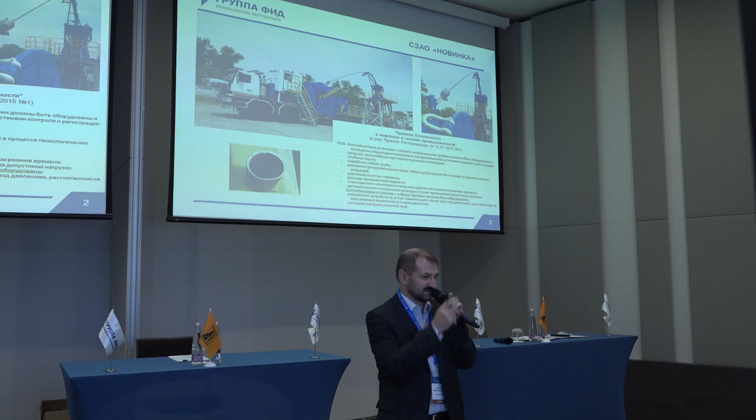Defect detector: we developed it 2 years ago, now we are improving it. So this is the defect detector for the CT tubular. You could see an example sample at the entrance to the room.

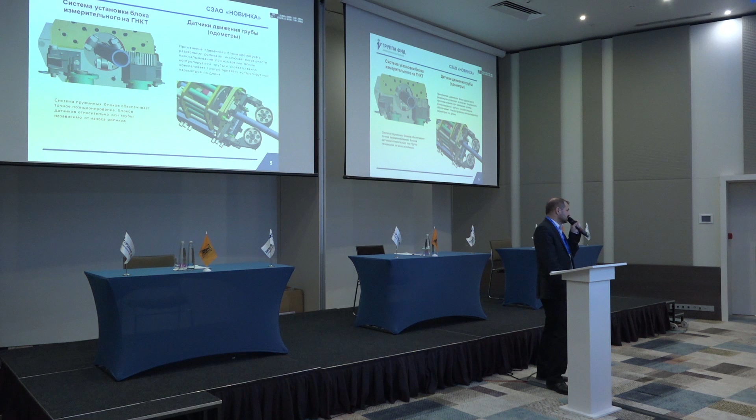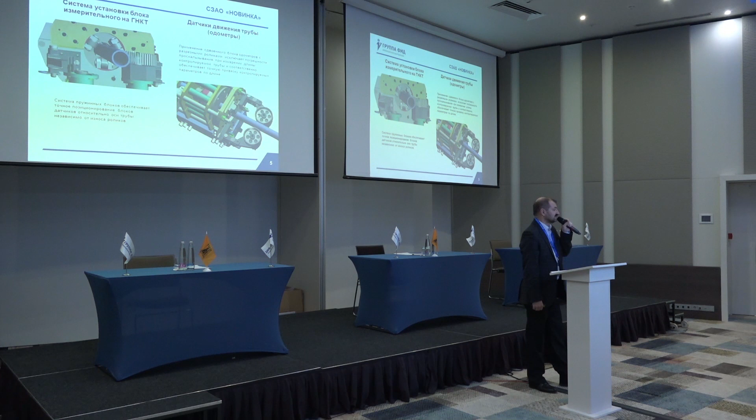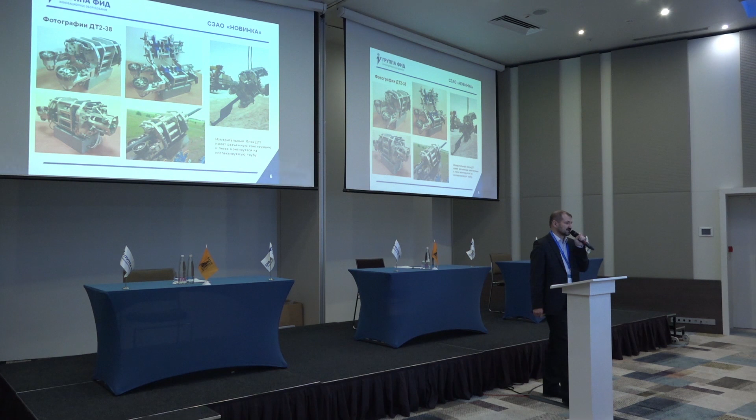It avoids sliding of the tubular. So we have rolls with special slots that take all of the mud, and we have two odometers, and we reduce our dependency on the tubular slips and slides inside. So this is a photo for the CT 38 millimeter in diameter. There is no point in pulling the pipe through the defectoscope. So we just open it and install the pipe.

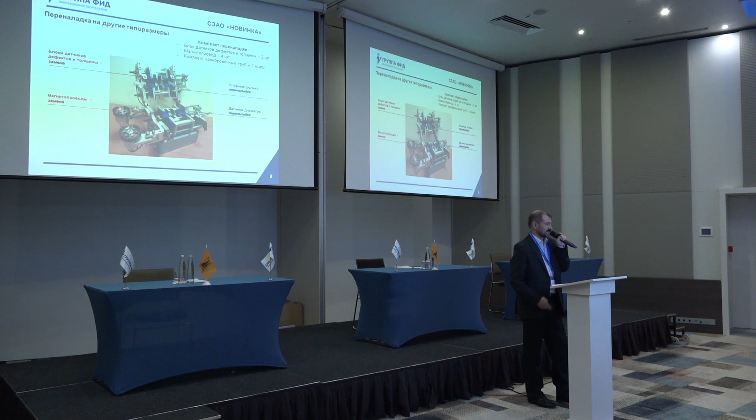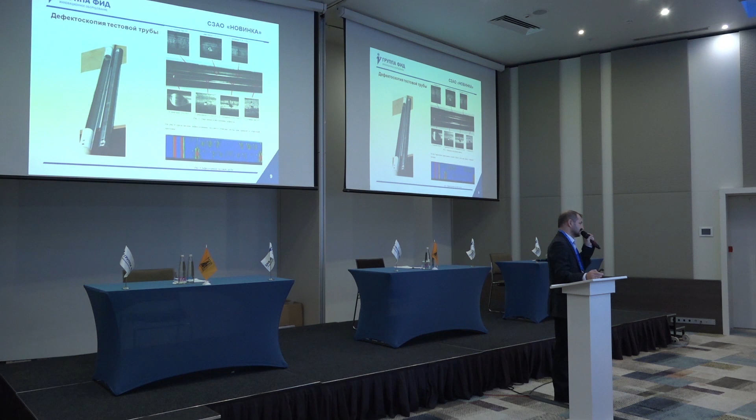So this resetting is done during one day. So if you move from one diameter to another diameter, you're replacing some parts, and you can ensure transit in the system to a new diameter. So this is the test pipe that we use when producing our detection devices. So this is the tubular with different defects. We pull it through the detection device to fine tune it, and you see how the information is shown on the screen.

We also developed a special software for this device. This is fully in-house. We started developing this software in 2018, and there were several versions. If you have a look at the beginning and now, we have quite considerable differences in this software. So this is the geometry, vibration, thickness, as a text and graphs. It archives all the data. The data is recorded on SSD, and later on you can analyze it.

There's a visual and sound signaling system. So for this defect, we might set the maximum parameters. If it is exceeded, you will receive a signal. And for the operator not to miss it, the sound signaling will last until the operator presses a button, and this is recorded in a special file. So if some unprecedented event occurs, you will be able to see the history.

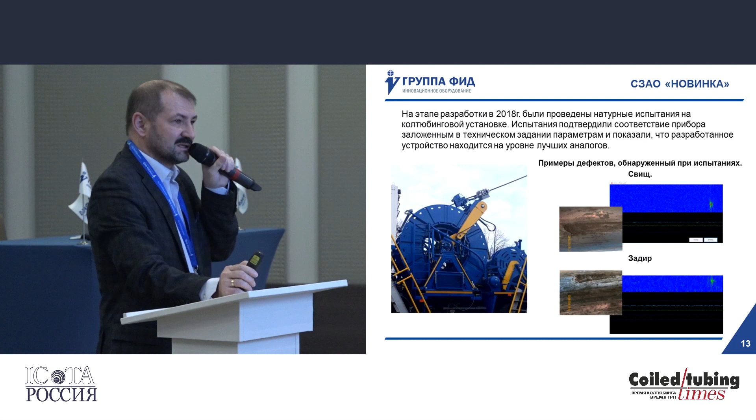So you can have a look at the photos. These are photos of our experimental works and tests conducted, detection of holes, and how these holes were depicted on the charts. So we developed our software, as I mentioned. It's the level of defect detection in particular. Over the recent years, we accumulated a lot of experience, so we received a lot of information and defectograms.

And if we take this magnetic detection method, it identifies the change in magnetic field. And at first stages, if you have 1 millimeter of additional material and 1 millimeter of removed material, it showed in the same way because the volume of metal was the same. Now we fine-tuned it, and all the defects can be divided into 3 groups, like small cracks, then small fragments like shavings, and the scratches outside, asymmetric scratches on the pipe surface.

And the software is built in such a way that it detects this difference, and when it sees a small volume loss of the material or a crack, it is depicted in red and green by the edges. If there's sticking of some material, it is marked in green in the middle and red on the edges. If we have scratches, asymmetric scratches, then green and red colors are used to depict the scratch.

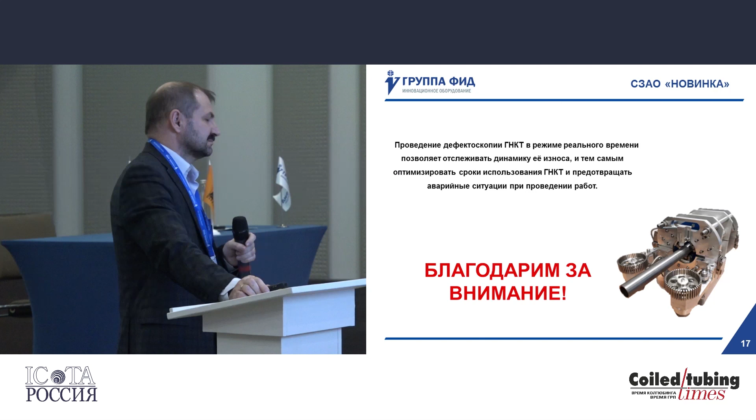Your detection devices are in operation already.

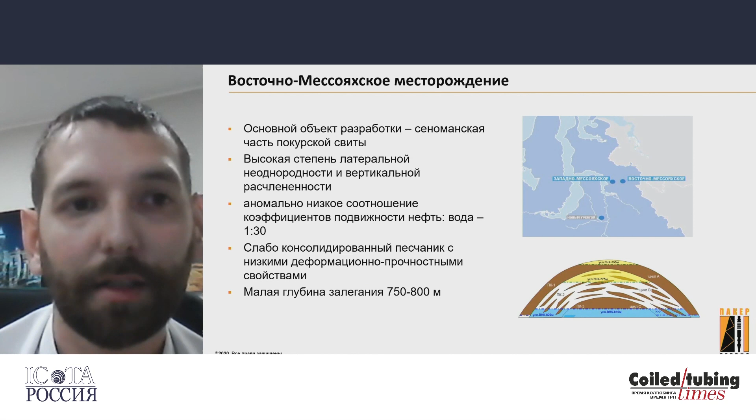There are different methods with the sand screen out and the production of fluid without sand screen out. And without sand screen out, we have chemical, physical, chemical, and mechanical ways of preventing sand produced to the surface. So the CTUs, we use various methods for preventing sand screen out, the bottom hole area treatments.

We use sleeves and collars, sliding sleeves, and a considerable part of works is normalizing the bottom hole. CT allows us to clean out the well bore and put it into operation. But today we will talk about a little bit different thing.

Historically, the development of this oil field can be divided into two phases. Phase one, this is well-known shallow wells, reservoirs with high sand content, and these are the challenges that we manage to tackle currently. However, there are other wells there. This is phase two with deeper reservoirs, 3,200 meters vertical depth.

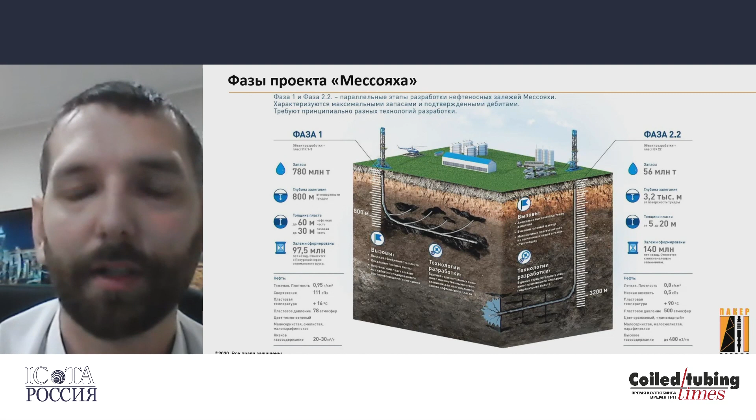These are abnormally high pressures and the complicated mineralogical composition of the reservoir and of the rock at this phase. So we have abnormally high pressure, as I mentioned, complicated mineralogical composition, and in this case we have light oil, which is very good and very feasible from the economic viewpoint, but high temperature. We face high temperatures there in this reservoir and in this formation.

Apart from the general challenges, we faced the challenges of a specific well. We needed to work at a horizontal well with a very difficult trajectory with a reservoir pressure of 490 bar. It's a deep well, around 5.5 kilometers, and the task was to activate fracking sleeves, restore the injectivity and get a stable fluid inflow.

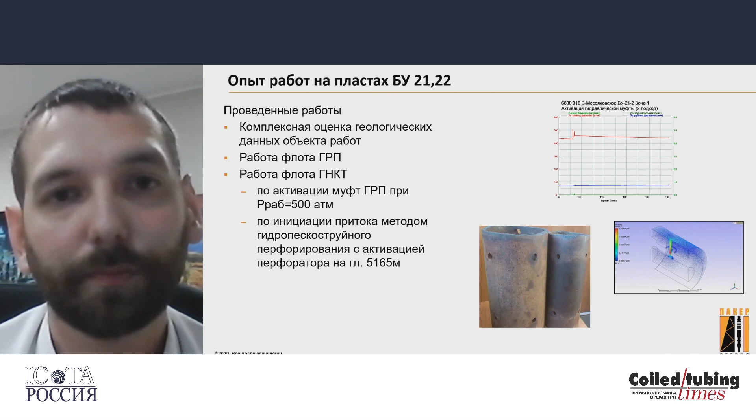You can see the activation of the fracking ports was not possible due to complications at the wellbore. We elaborated a set of measures to create additional perforation in the target interval where production was possible. After sand jetting in the target interval, we achieved the following. The well became flowing, so we achieved record high yields for this well, and phase number 2 confirmed its potential because we managed to produce light oil that allowed us to continue working in this formation at phase 2.

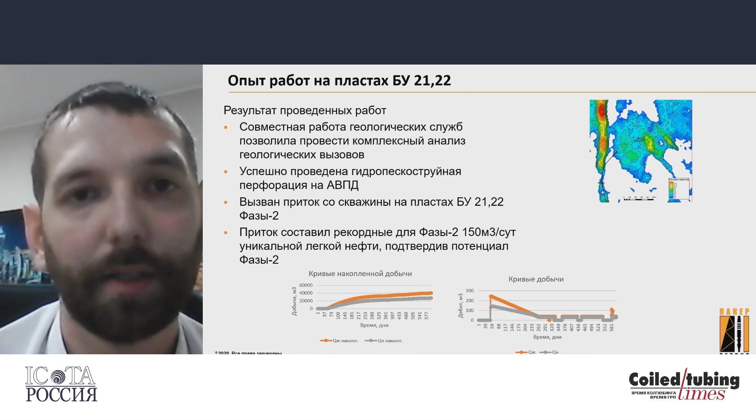First of all, the success was possible due to the work of our geological services that managed to do proper geological analysis. I can say that we confirmed the good potential for this formation. We confirmed the complicated mineralogical composition of the formation that requires addressing geological challenges, and this requires an integrated approach, CT and fracturing fleets, with high involvement of the client and of the contractor. So we did sand jetting in abnormally high reservoir pressures.

So I would like to extend acknowledgements to our companies, Research and Technical Center of Gazprom Neft and Packer Service Company, for the possibility of sharing with you our experience with this integrated approach to tackling geological challenges. That's all from my side, and I stand ready to take your questions. Thank you. We have questions.

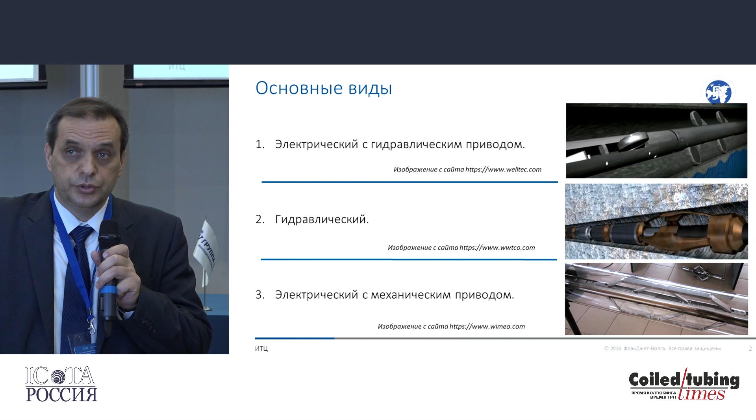After that, we developed the hydraulic control system. At the second phase, we need to modernize our hydraulic system because it requires some modernization. In parallel, we work on the electric control system that will be operational in parallel, and we also develop some attachable equipment to these tractors.

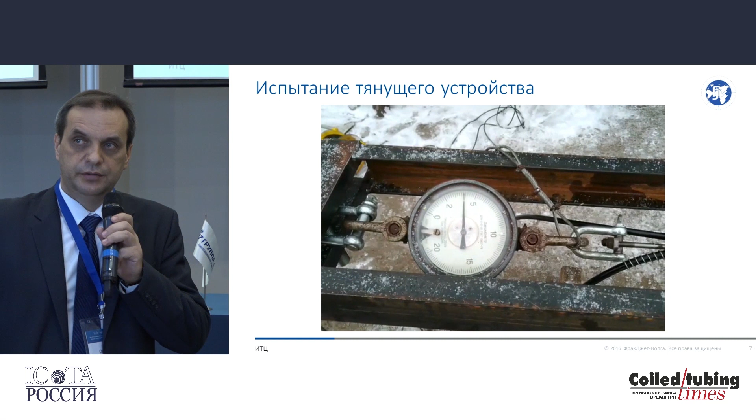As far as the main characteristics are concerned, Welltec is the leader in terms of the use of tractors. And if we compare the specifications of our tractor, it's 76 millimeters, which is comparable to what the competitors have.

The length of our tractor is 6 meters 41 centimeters. Probably with the update of the hydraulic drive, the length will change. It will be 6.5 meters max.

We haven't yet developed the electric drive. The pull force at 350 bar of pressure, it's quite a large pressure, we will not be using it, but at 300 bar, it's 4.6 tons. The weight is 176 kilos, and the fluid flow rate is 500 liters.

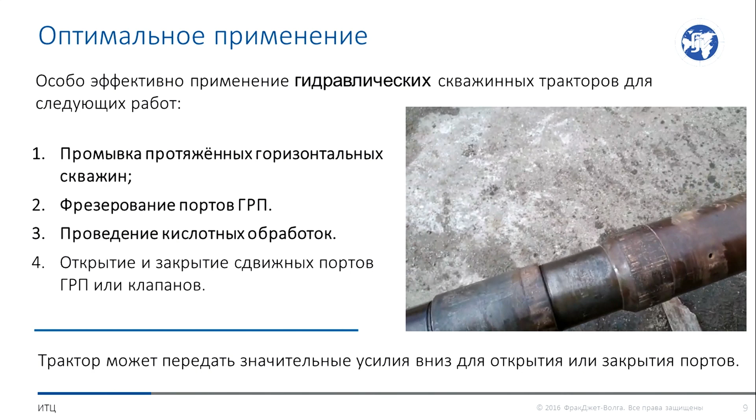Why do we use hydraulic tractors? First of all, to flush long horizontal well bores. Electric tractors have difficulties with this because you might run a sludge catcher device there, but it will not be able to clean the well properly. That's why hydraulic tractors are better compared to electrical ones.

Tractors can also be used to mill fracking ports. Hydraulic tractors are out of competition because we can select the optimal pressure, and with the optimal pressure, the tractor will mill the fracking ports.

We can also do acid treatments. We can open and close sliding sleeves. You can use this tractor to close the sliding port. You can see how it closes the sliding port.

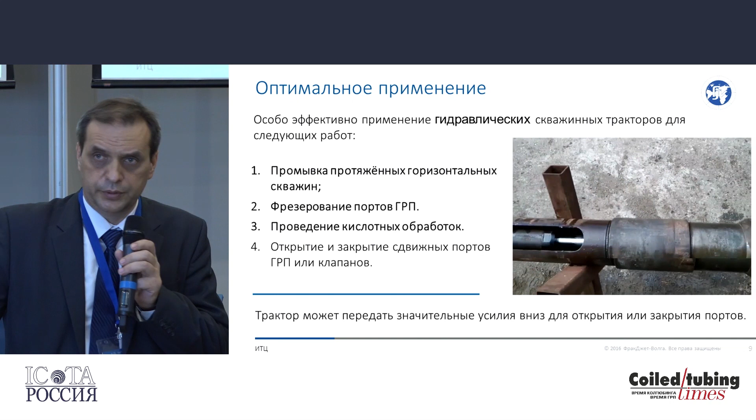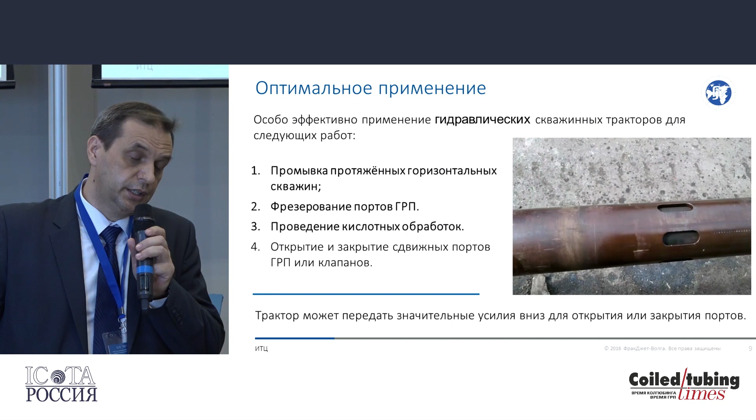You can also use the tractor for opening and closing ports on the bottom hole, since the tractor can generate considerable forces, which significantly simplifies the work of opening and closing ports at the bottom of the well. That's the end of my presentation.

Are there any questions? I will take your questions. Do we have any questions to the speaker? Then I will ask one.

As I understand, this tractor is meant for cased wells only, so far, yes. I judge by the slides - it won't be able to work in the open hole, because the contact stress would exceed limits and you would damage the formation.

We developed this ourselves. At the moment, most of our jobs are done in 114mm casing, so we designed it for that. But we have all the equipment in-house, so we can reconfigure it for the open hole. It's not so difficult - it's just not currently our task.

As I understand, the direction of movement is only one way, in one direction. Yes, it moves into one direction only.

So we don't have any further questions then. Oleg, thank you for a very interesting presentation.

Now we have the next presentation, again online. We have a connection, and we will have the next online presentation.

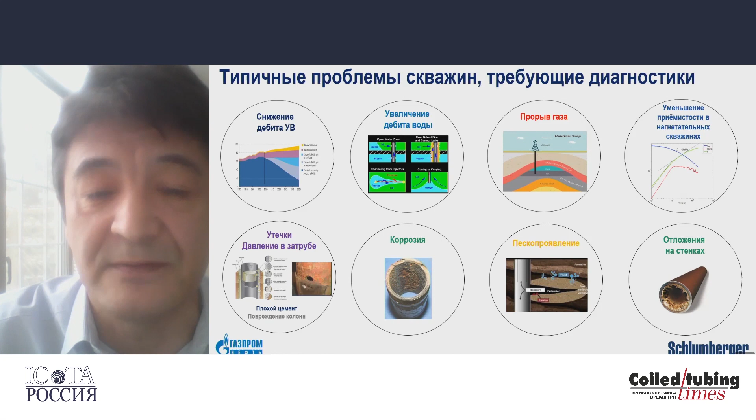Speaking about the typical problems, they are not new: this is well yield reduction, increase in water cut, gas breakthrough, etc., and sand production. You can see all these main problems on the slide.

There might be many, especially taking into account that well completions are becoming more and more complicated. We have horizontal well bores with non-cemented liners, with filters and sleeves, and more sophisticated completions with inflow control devices, etc.

Whatever completion you have, one of the most important aspects is preparation of the well for the survey, because we need to survey the whole well bore, the whole horizontal section, and we face some blockages due to debris, etc. There's a need for milling ports and doing other preparations.

So on this slide, you can see some analytical information on how we can prepare the well with different methods. Of course, preparation with well workover is the best approach - you can clean out the well, mill all the ports, but each method has its own disadvantages and cons.

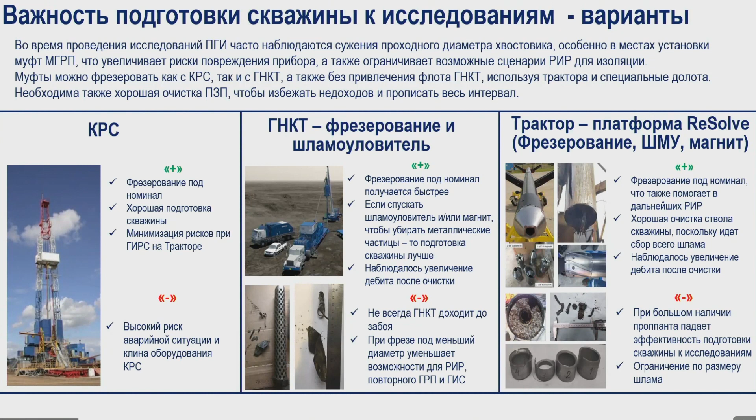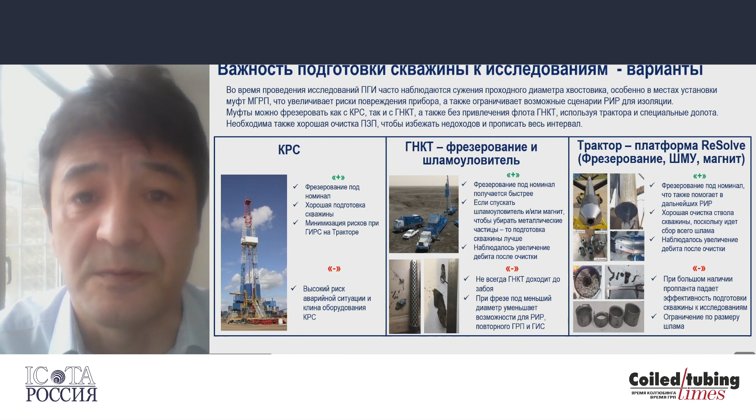So recently, well tractors are widely used, and our company is also using these well tractors. As the previous speaker mentioned, one of the difficulties you encounter with tractors is if you have large amounts of proppant or debris, then your tractor is not efficient. However, it might reduce the burden on the workover teams. What difficulties might we encounter when identifying the inflow profile in low-yield wells?

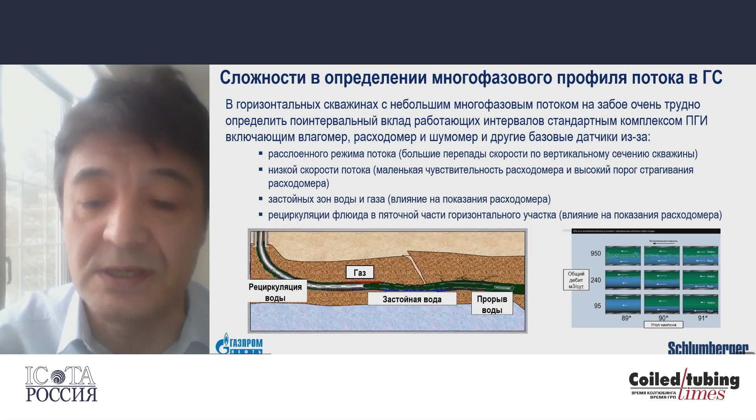Very often we have not a turbulent flow. There are some idling zones depending on well geometry. There is recirculation, especially in the heel of the well. And everything depends on the trajectory.

I would like to show you a number of short videos. These are the tests conducted in our research center in Cambridge. So the angle is 90 degrees, same content of diesel and water. And the dyes were used so that it is visible how the flow behaves.

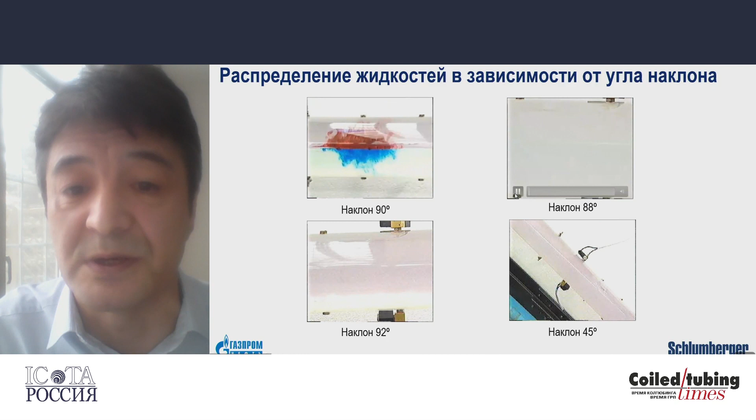So the equal content of oil and water. The speed is the same and phase distribution is also the same. And now the inclination is 88 degrees. You see what happens. The amount of oil and water is the same, but the lighter fluid takes smaller volume but moves at higher speed.

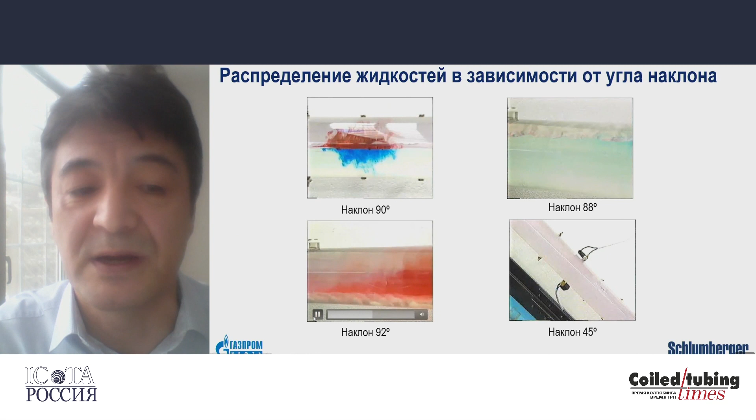So if we reverse the situation, then you can see a 92-degree inclination, and the heavier phase will take lower volume and will be moving on the bottom part of the tubing.

With the angles from 20 to 80 degrees, here we have a 45-degree angle. We see that the heavy phase will be going up and falling down. This is recirculation effect that we call it. So that's why very often we can see water in well, but not all the water is produced to the surface.

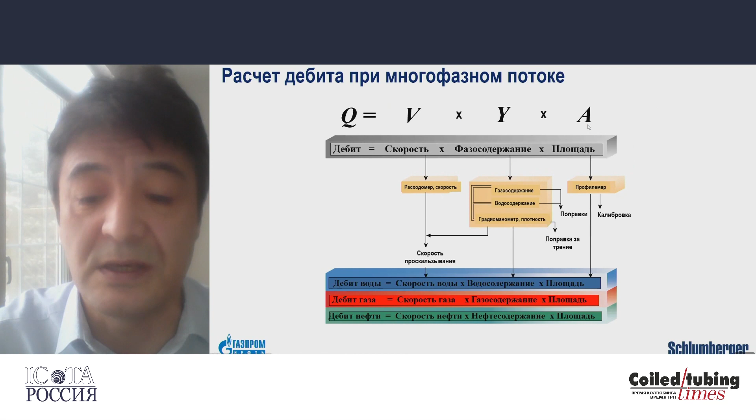So our approach to identify the flow rate or well yield with the multi-phase flow, we need to identify the velocity of a phase, what is the share of the phase, and we need to know the area.

For this, we developed an integrated FSI tool. The tool has 5 distributed flow rate meters, and 6 optical sensors and water content sensors. And it also measures the cross-section area.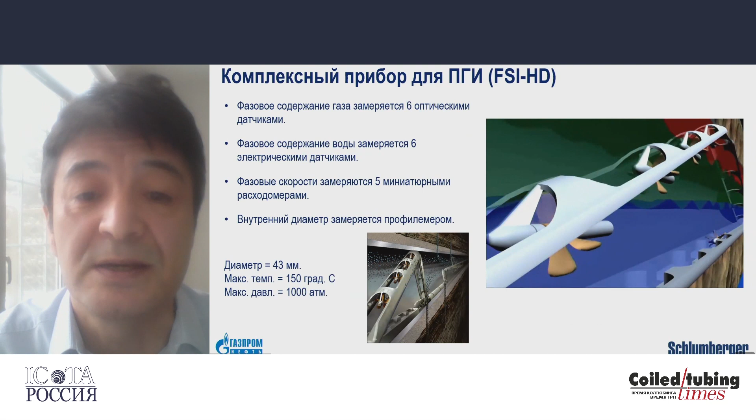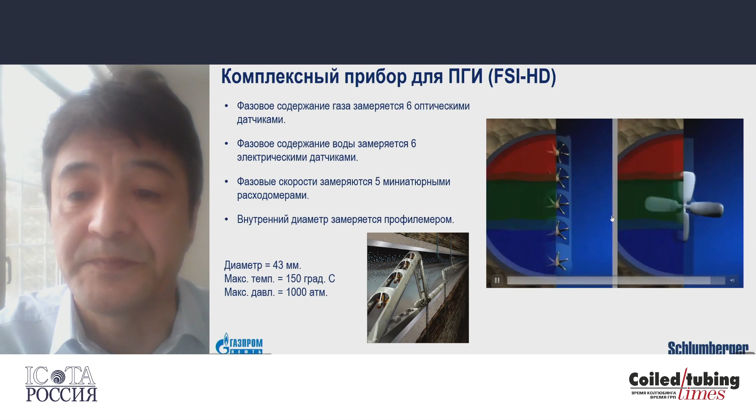So the design of the tool allows it to stay in one position inside the tubing. This is the ideal case, 1/3. So each flow meter is located in its own phase.

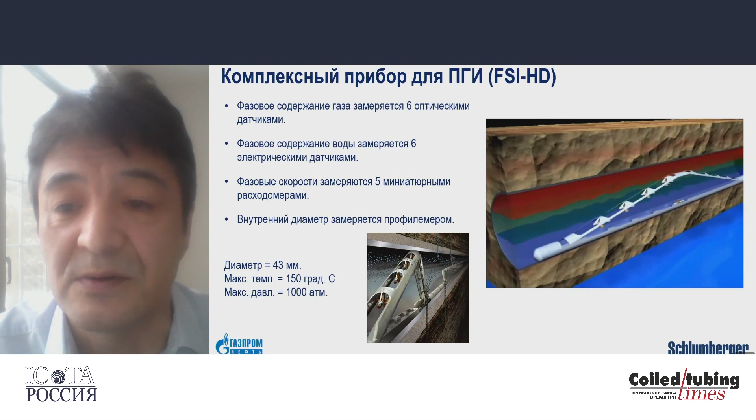If we take the fully fledged flow meter, you will encounter problems because the flow meter will take different phases, and the rotation of this flow meter will not be able to correctly measure the debit, the yield of each of the phases.

Together with Noyabrsk Geofysica and other companies, we were trying to select the optimal set of equipment to survey the wells. This is a map of tools to be used. There might be different ways of well stimulation. It might be compressing, and the delivery of the equipment might be done by a tractor or on a wire line, on a cable. There might be advantages and disadvantages of each of the methods.

The ideal way of flow stimulation is the ESP, the bypass systems with the necessary diameter. We have such systems currently. And the well tractor - we selected for our operations the well tractor because CT with a cable injected is not always available, and we need to make quick decisions. And we have selected our FSI tool and the noise meter, spectral noise meter, in order to check for the behind the casing flows, etc.

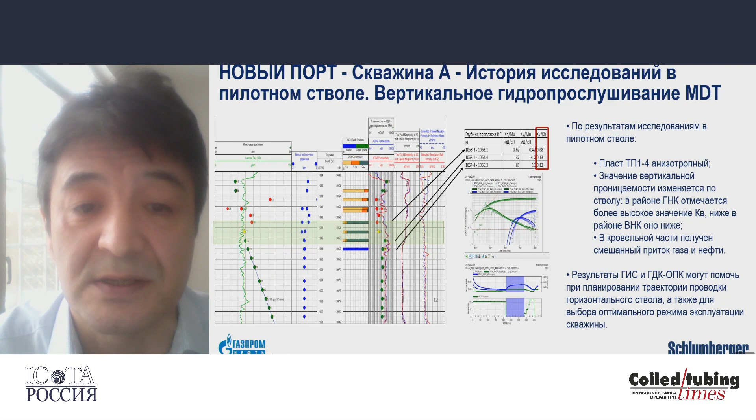So, depending on this data, of course, taking it into account, you can design the layout of the wellbore, and the behavior of the well in its different sections can also be taken into account in order to reduce this gas production.

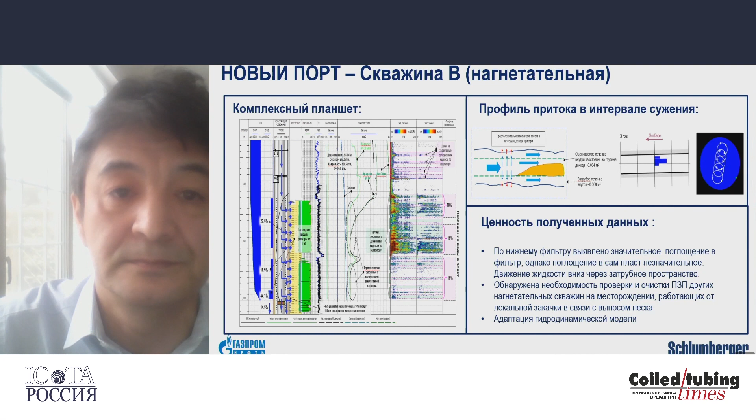So we observed the sand screen out and reduced diameter for the liquid flow, since we have distributed flow meters. The upper flow meters were rotating, the bottom ones were not rotating. This again confirmed the geometry here. And for the client, they needed to clean the bottom hole area, and they also adapted the hydrodynamic model.

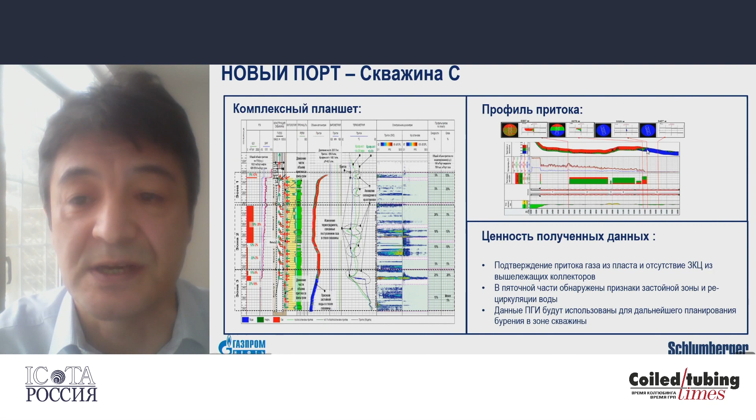So we needed to identify the inflow profile. We identified all the phases. We identified the idling water in the heel of the well. And this data will be used for planning of further drilling in the area of this well.

And this is the last case, well D, injection well. And this example is very nice because we compared injection data from last year and this year. We compared the logging data, whether the redistribution occurred or not. And yes, we revealed that there was a redistribution in injection.

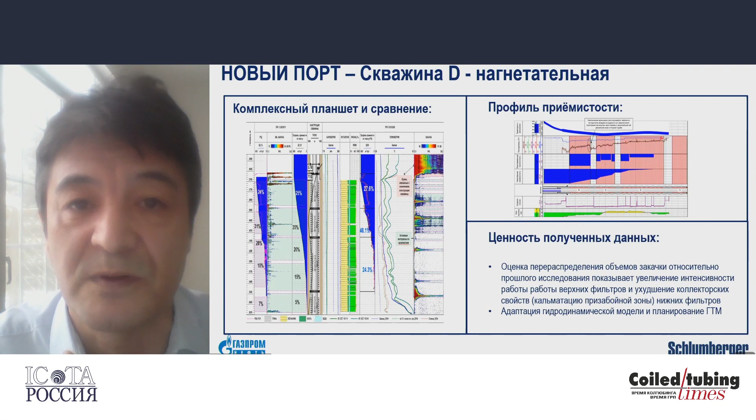So the upper filters started to absorb more fluid. The lower ones started to absorb less. This shows the clogging of the lower filters here. So they planned some works to clean the bottom hole zone, and the hydrodynamic model was adapted.

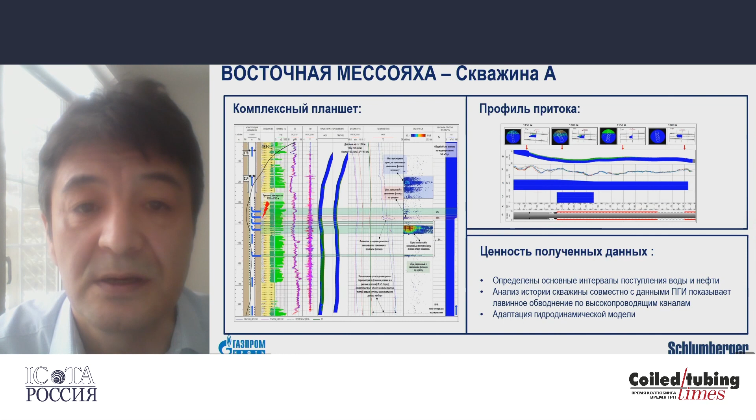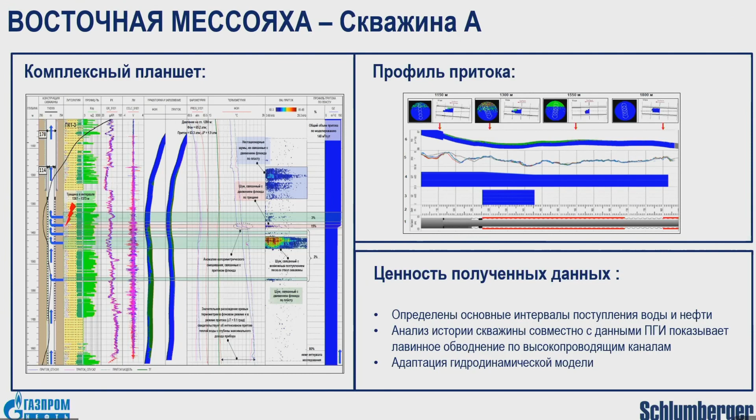The eastern Mesoyakha field, well A, we needed to identify the reasons for high water cut, as the logging data showed. So there's a water inflow through the cracks. Again, the client had to adapt the hydrodynamic model for this well.

At the end, I would like to say that probably the cases presented by me show what kind of tasks you can tackle and resolve. And these solutions are very important, not only for individual wells. This information, this solution is also very important for planning further activities at the oil field.

Moreover, as experience shows, you need to do service with the adapted technologies and software. And we showed our approach to this. And the survey program is adapted to individual wells and its conditions. So the preferable methods to deliver equipment is CT with cable or tractors to do online recording. So if you do it in autonomous mode, you will have some limitations in data recording.

And it is also very important to properly prepare the well so that we can survey the whole interval and the whole length of the wellbore.

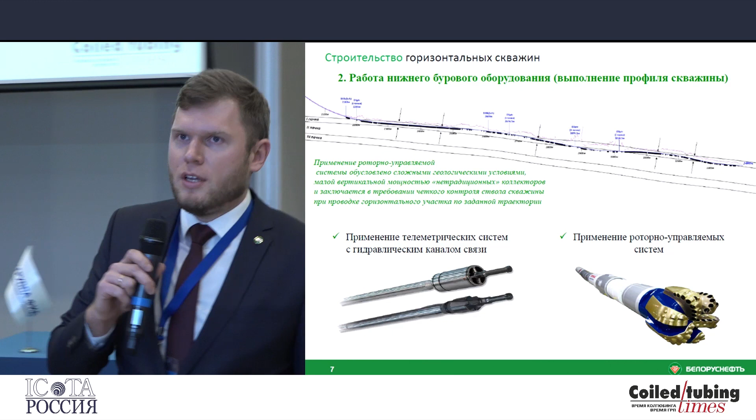well drilling. After that, we needed to ensure high quality of drilling, so we modernized our drilling rigs. We procured only modern drilling rigs. We modernized our older drilling rigs, but for complicated geological and technical conditions, we did drilling with the backup. We modernized the downhole drilling equipment, so we're using a system with a hydraulic communication channel, or we use a rotary system in difficult geological conditions.

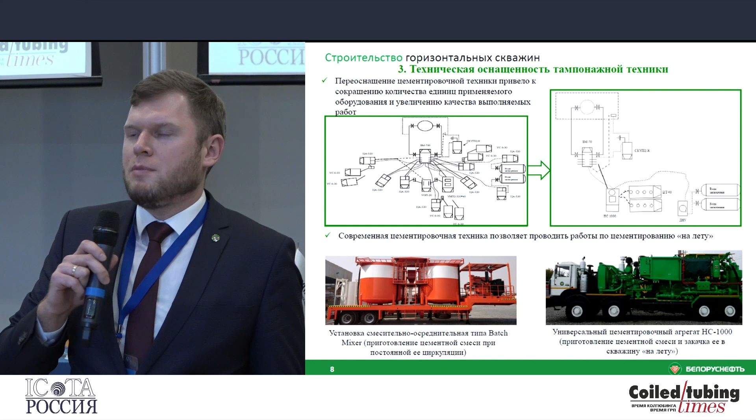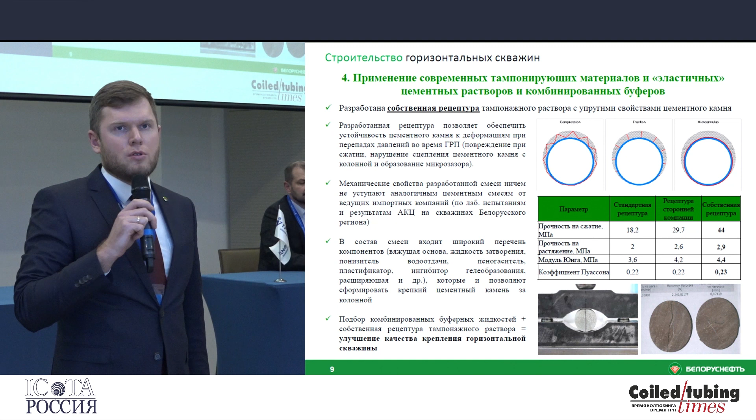We upgraded our cementing equipment and improved the quality of cementing. Our machinery allows preparing cement slurries on the go. We also achieved certain achievements in developing our in-house cement slurries. We have our elastic cement slurries that are better than the foreign elastic cement slurries that were used at our oil fields. The composition is quite difficult, but it enables us to put perforation clusters at a close distance to each other.

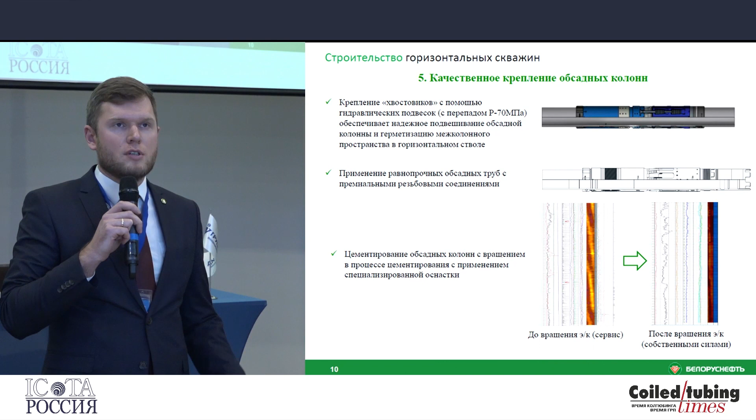Summarizing this drilling part, we can make the following conclusions. Initially, we had mainly vertical wells. The horizontal parts were cased with non-cemented assemblies. Length of the wellbore was up to 400 meters. Now we improved the drilling velocity. We procured and rented modern equipment.

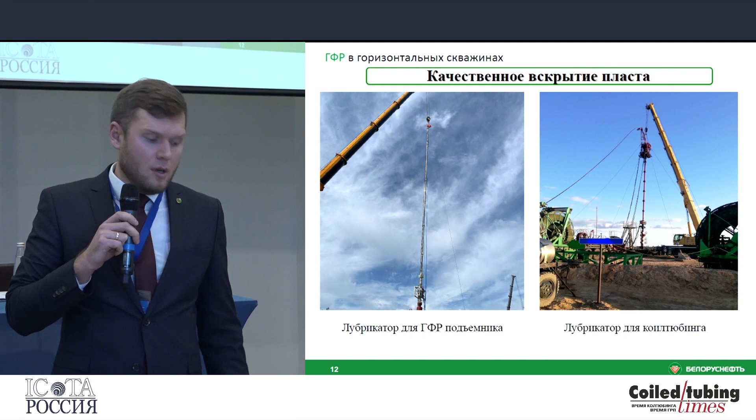To conduct quick and high-quality fracking, we lacked specific equipment to close the intervals and perforate these intervals. So we procured some additional equipment for the CT unit, for the logging unit, and for the tubing. This modern equipment allows us to set plugs with a logging cable, up to 8 clusters during one trip. We use our in-house setting equipment. And we plan to develop or procure an innovative perforation system from the West and the drill-out system.

So we needed to tackle our fracking capacities. As the fracking fleet manufacturers mentioned, we had problems. The capacity is 7 to 8 cubic meters per minute. It's not enough because these are 2 perforations per stage. It's not enough if we want to move forward and increase the production from our wells.

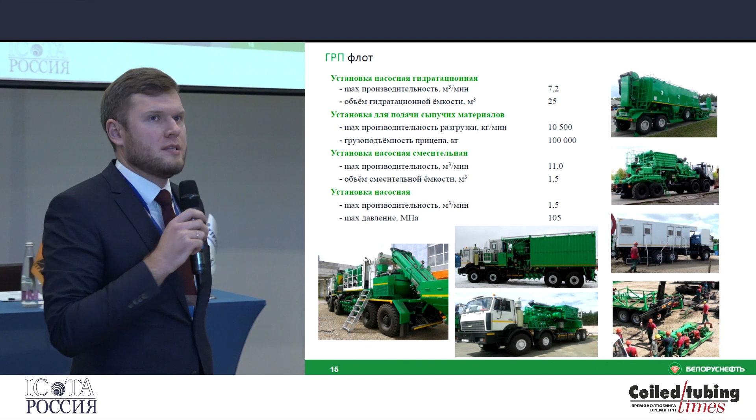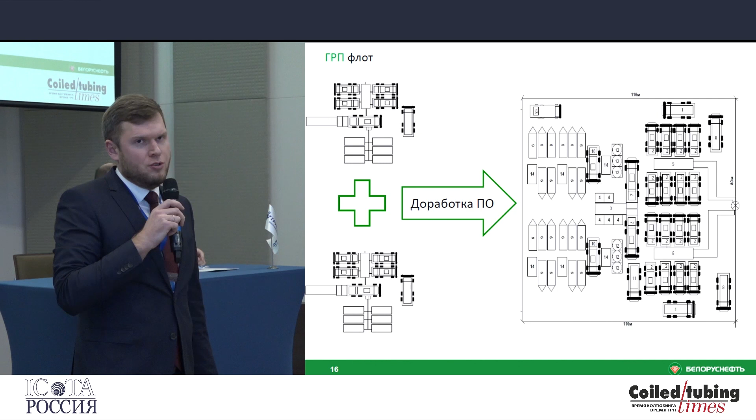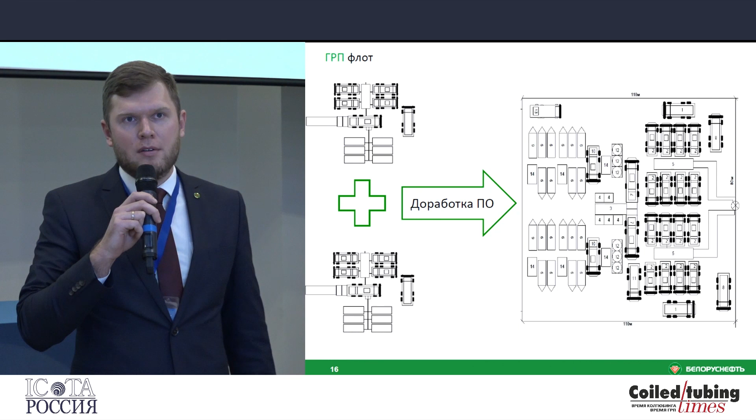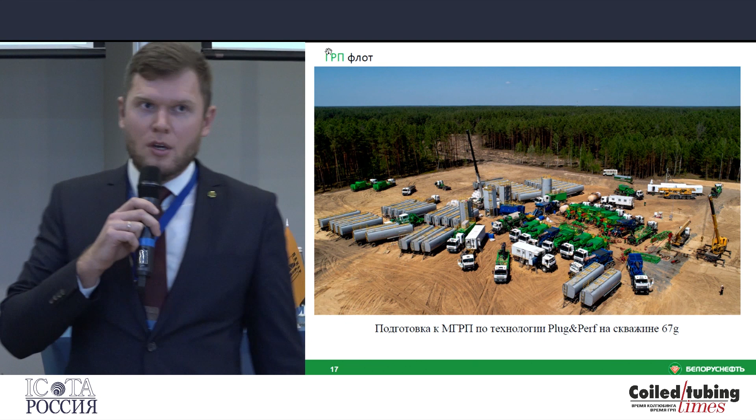That's why, together with colleagues, in quite a short period of time, 2-3 months, we established an integrated single system collecting all the necessary data and information that would allow us to have up to 14 cubic meters per minute flow rate with maximum proppant concentrations of 1,400 kilos per cubic meter, thanks to using 2 blenders in parallel. We involved quite a large number of personnel for this operation, but if you mobilize the fleet properly, it works well. This is our well number 67, bird's-eye view.

In parallel with the fracking fleet, our engineering center was working hard. Since 2007, we have been using guar-based fracking fluid with the cross-linker, but we updated it for different geological conditions, and we also created fracking fluid for plug and perf. This fluid allows doing frackings with small friction losses and quite good flow rates, up to 12 cubic meters per minute.

We have tested all 3 types, the suspension, emulsion, and powder type, 8 manufacturers, 20 types. You can read articles in SPE about this, and in 2021, we'll be using high viscosity fluids.

And a few words about plug and perf. All our multi-stage frackings started in non-conventional reservoirs and formations. It was 2014, ball drop assembly, nothing interesting there. Then in the same well, we refracked with this BHA by ourselves, so we developed the technology in-house.

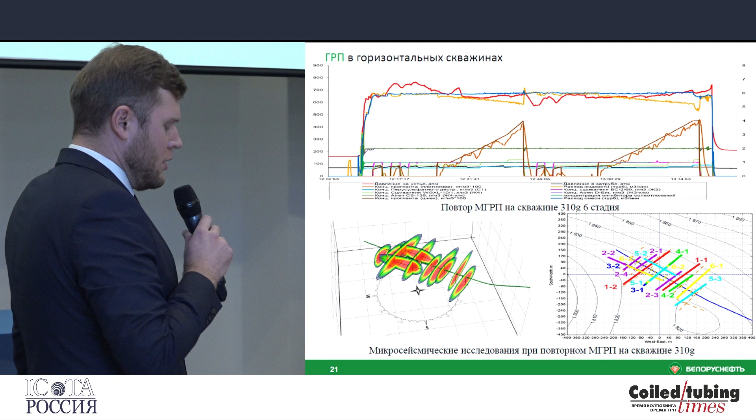In 2019, we did refracking, 6 stages, each stage 2 proppant stages. With the microseismic studies, 300 tons of proppant with the maximum concentrations 400, 500, and the well was put into operation with better parameters than at the very start. It is operating for more than 1 year already with very good productivity and yields.

Well, it shows that in 2014 we were not ready for this multi-stage fracking, and then in 2019 it was okay. And our well 411 in Rechitsa, a pilot well for plug and perf. We did 11 stages there. On this slide you can see stage 8, 120 tons of proppant injected. We did microseismic studies at 9 stages.

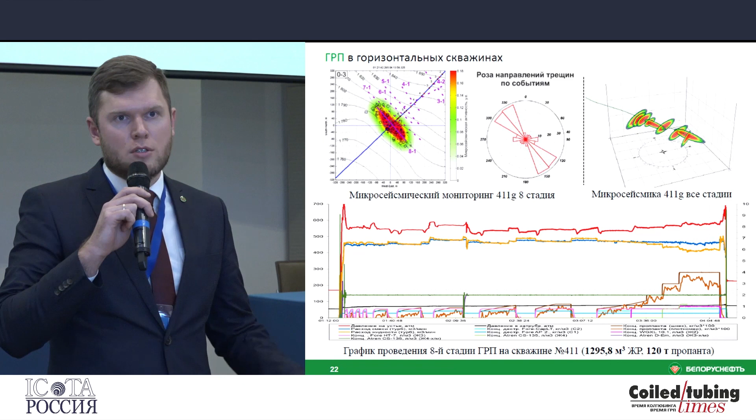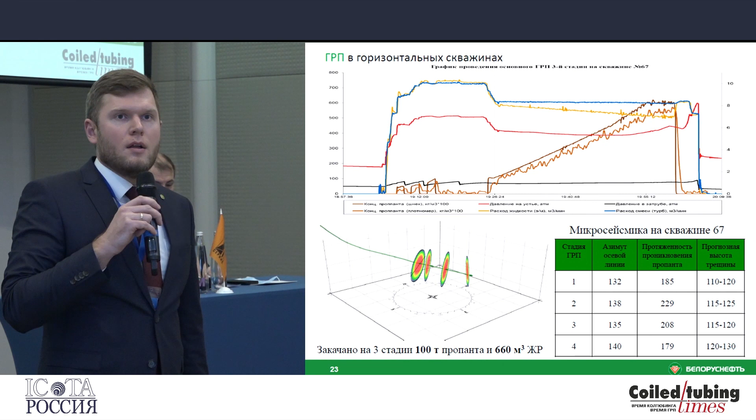The wellbore is in the proper direction. The fractures along the wellbore shown by microseismic. We had a stop at the first fracking, and during the second fracking we had a fracture along the wellbore. So these are standard conventional collectors with porosity of 12. These are classical collectors that we have.

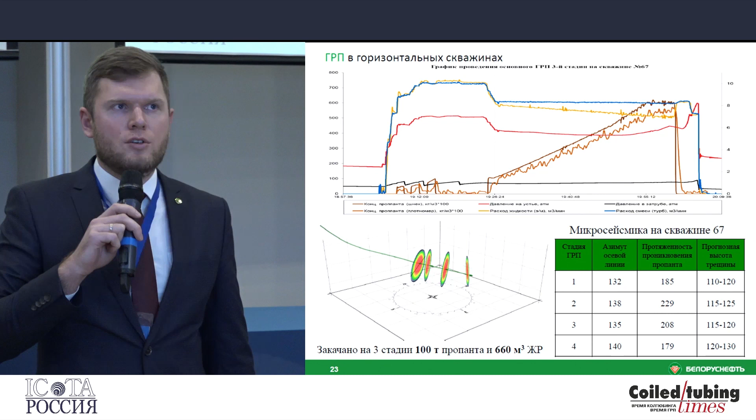We did plug and perf on a cable. At 411 it was CT conveyed, it's cable conveyed plug and perf. We were washing every stage 1.5 to 2 hours for running 4 trips. We did 4 stages, around 400 tons of proppant injected, 2,000 cubic meters of the fracking fluid.

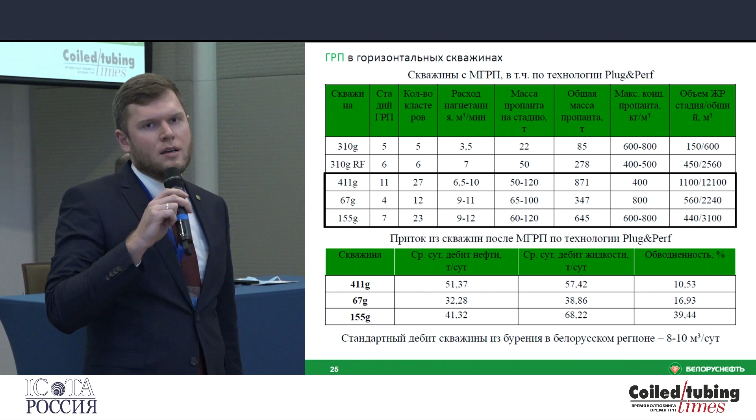And well 155, 7 stages, 3-4 clusters per stage, up to 12 cubic meters per minute flow rate, 120 tons of proppant max per stage. 3,100 of fracking fluid. Currently, we did 3 multi-stage plug and perf operations. You can see the results on the screen, which is 40-50 tons of oil per day. It's quite okay for us, because the standard wells, which are sub-horizontal with multi-stage fracking, it's 8 to 10 tons per day, so we achieved quite good results.

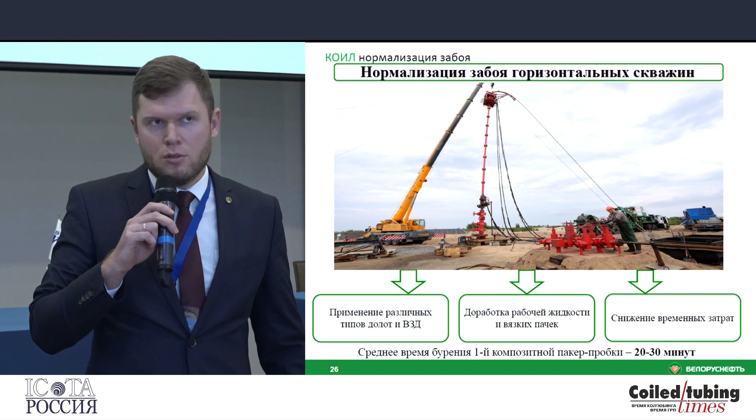In order to do high quality plug and perf, we need to quickly normalize the bottom hole. We're testing now various screw motors and drill bits. We're updating the fluid to reduce time. Current drilling time is 20-30 minutes per plug, and we plan to reduce the time to 15 minutes with washout.

And a few words about the upgrade of our fracking fleet. Thanks to our Belarusian colleagues, we did it very quickly. However, we faced a number of problems. The first is the limited flow rate, 14 cubic meters per minute injection flow rate, and large area covered by the fleet on site.

So we have the following plans. First, to buy a high-capacity blender and high-capacity chemical unit that would allow us to reduce the number of equipment units on site and ensure doing 7-8 clusters per stage. We also need a special tank for high viscosity fluids. The injection flow rate above 12 or 14 is definitely not for guar-based gels.

And due to the legislation of our country, we are not allowed to put pits at every place, so we are planning to use vertical telescopic tanks up to 300 cubic meters in volume, and they will allow us to reduce the area that we cover with the fleet almost twofold.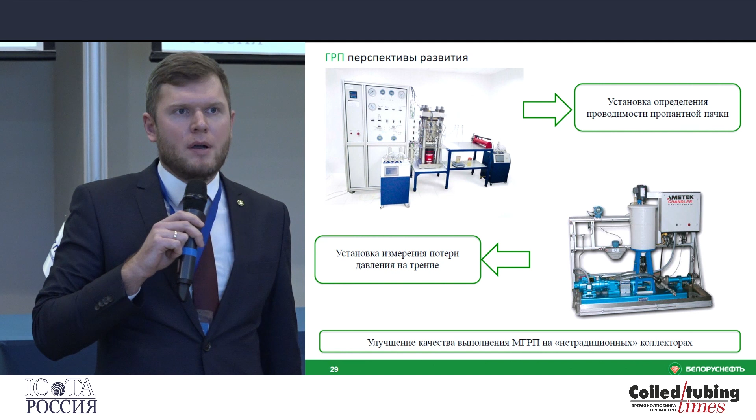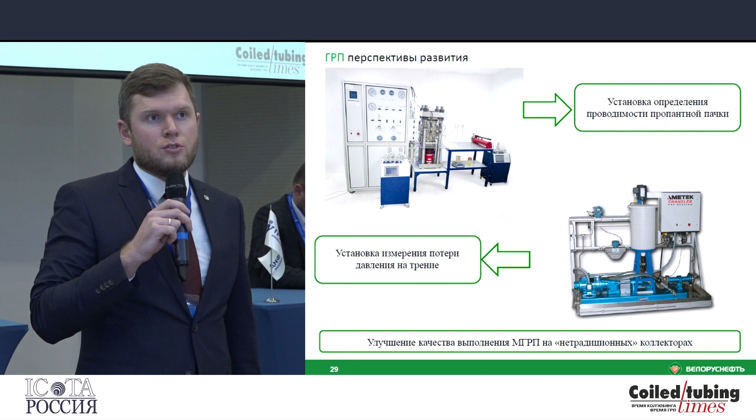So we are working in our engineering center. We procured 2 expensive units for our laboratory in order to identify the conductivity of the proppant pack and to identify friction losses. These tests will not only allow us to better do fracking in the unconventional formations, but will allow us to be more competitive in tenders.

The main conclusion of my presentation is that in 2021, our company will be able to do high-quality plug-and-perf fracking, starting from well design and ending with multi-stage cluster fracking, normalizing the bottom and running the downhole equipment on a turnkey basis. Thank you.

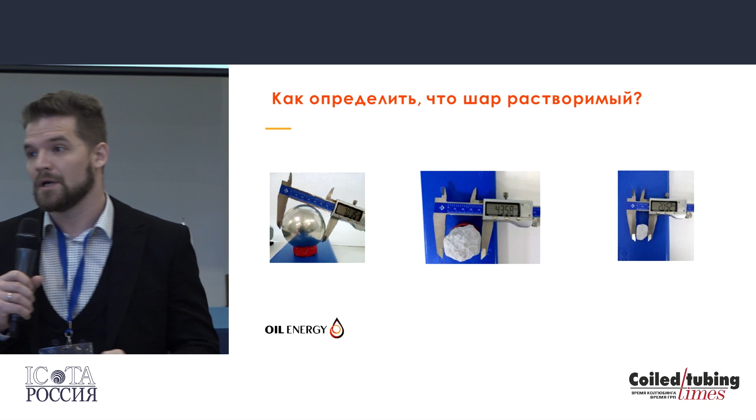They take a jar, take 3% acid, heat it up to 90 degrees, and then see whether the ball gets dissolved or not. And they take it out and measure the diameter once in a while. Some get smaller quicker, some over a longer period of time, but eventually they all get dissolved. Usually you have a lot of pictures of different stages and measurements taken every 2 hours, and they produce a table to see how the ball diameter goes down.

And it's good that it has a linear progression, and you can run the estimates of when a certain diameter will disappear. This is the picture that customers usually seek and we produce. Unfortunately, in the industry, in our country, the approach has been like this. We look at this picture. We have a 70-millimeter ball. What is the seat, the saddle diameter? It's, for instance, 67.

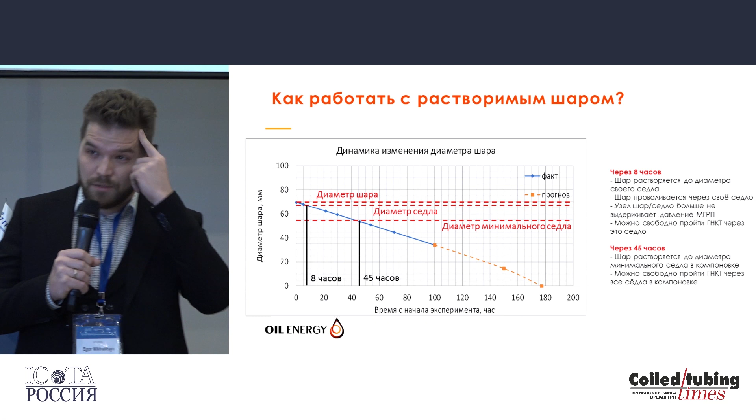So we see that it will reach the saddle diameter over this time. Then there's also the minimum saddle diameter in the CT completion string, usually the minimum tolerable saddle diameter. Looking at this chart, people usually think it takes 8 hours to dissolve down to the saddle size and then to the minimum saddle size over 45 hours.

And they relay this information to the field, and they think that they have 8 hours to do the frac job, and after that the ball will just fall down. And after 45 hours I will be able to go down with the CT because all the balls will have dissolved by then. Unfortunately, this is how people treat this kind of data.

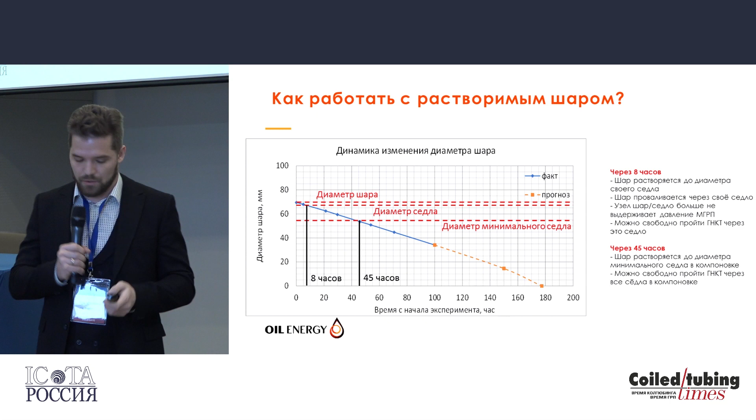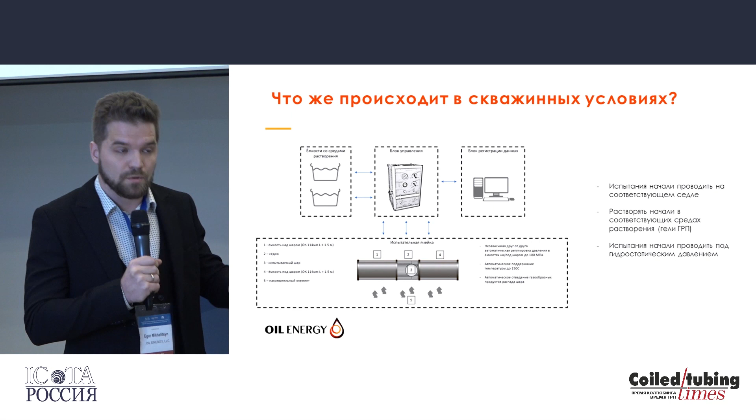We've been working with soluble alloys for many years now, and we designed a test stand that emulates the bottom hole conditions. So we create hydrostatic pressure, that is the approximate bottom hole pressure. So we're looking at figures.

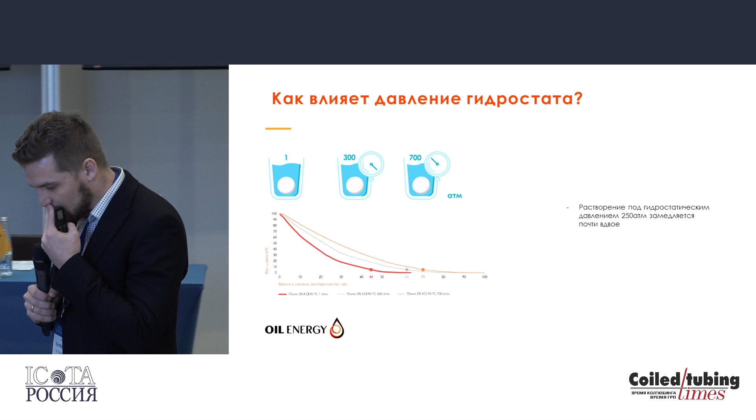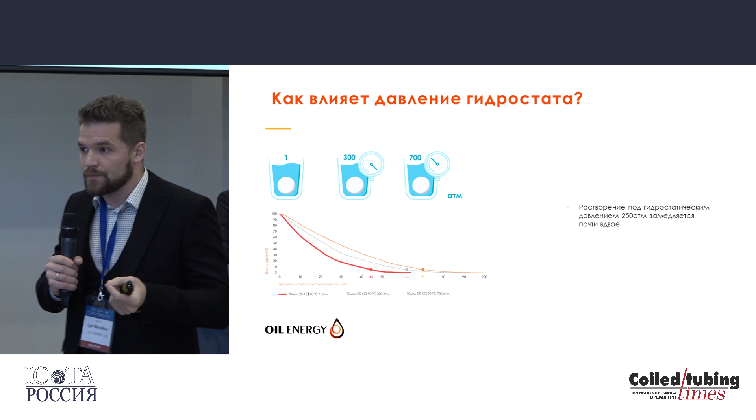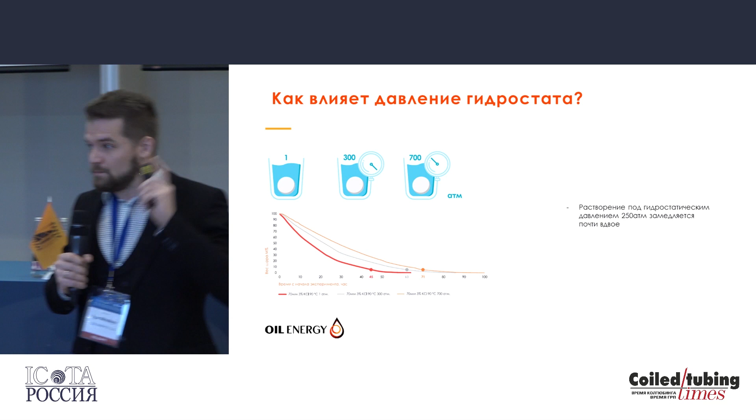So if we're looking at 250 atm, this kind of pressure would slow it down twice, and the greater the pressure, the slower the reaction. Furthermore, the important physical parameter is that we have a ball sitting on the seat, not just in a jar with hydrochloric acid. So what happens?

This is something that we told about in September at SPE in October. I would like to once again walk you through this. So we identified several zones. The A zone, the so-called cap, because the A zone is covered with fluid and it works quite well. Then we have the B and C zones.

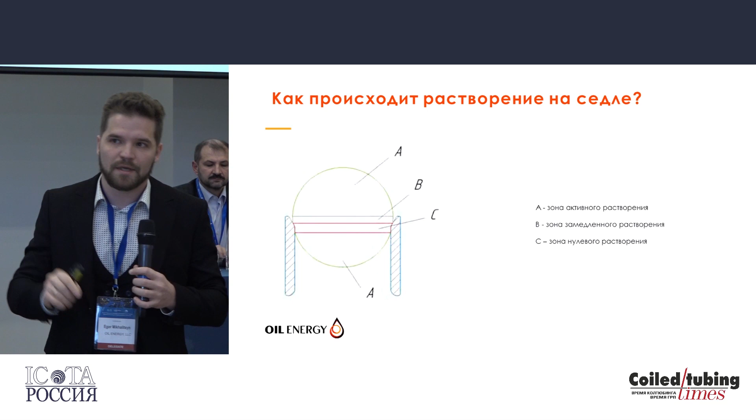The C zone is actually the metal-to-metal contact patch, and there's no fluid there, so there's no solution there, so there's no reaction. Furthermore, there's also the B zone. The B zone is the area of a slower reaction, and the B zone gets clogged with debris of the A zone that got dissolved previously.

So what happens with the ball when it gets dissolved downhole? It sits on its seat, starts getting dissolved, and you see that there's a certain sort of a skirt that remains intact halfway through the process. And if it goes further, it basically makes a curtain out of this ball that shuts off the seat, and it keeps. And after that, there's a pinhole that appears at the center of that curtain, which acts as a valve.

And furthermore, this metal-to-metal patch gets much denser because there's the pressure, and the central part is easy to penetrate. So there's no such thing as the ball dropping out of its seat. It never goes through its seat, actually.

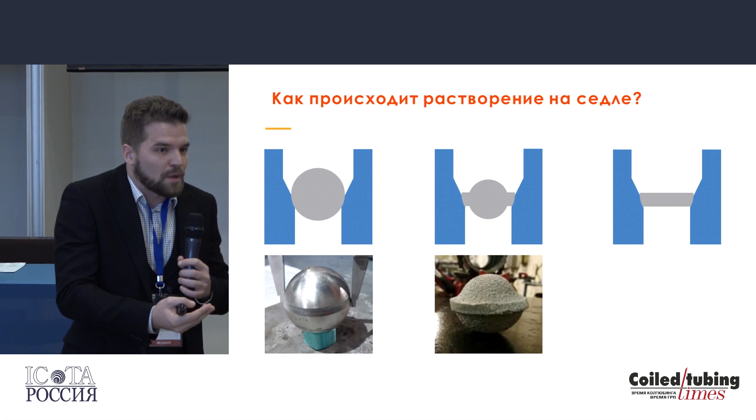And we cannot tell you exactly after how many hours the ball gets dissolved completely, because it does not get dissolved completely at all. So what happens is that you end up with sort of a screen there, like a curtain, and then with a pinhole in the middle that starts corroding.

So basically, we produce this expectation and reality. The expected time of connection between the frac job stages, which is supposed to be 8 hours, actually turns out that the real connection between the hydro frac stages happens after 370 hours, not 8.

Furthermore, if the customer has an expectation based on the foundation of the conducted tests that the ball will drop through its seat after 8 hours, in reality, it drops after 1800 hours.

Which means that whenever customers think which alloy to choose, they usually opt out for the alloys that usually take much longer to dissolve downhole than people would expect. Because ultimately, they usually run into balls that don't get dissolved at all, because there are many factors that affect the reaction, and sometimes the reaction does not get triggered at all.